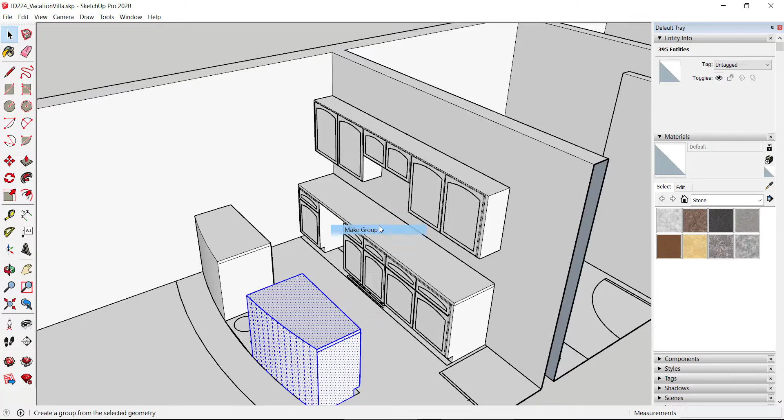Actually, what I'm going to do first is group these cabinets together. So I'm going to triple click on this cabinet, and you should see that the doors and drawers also go. Right click, group, triple click, right click, make a group. Same thing here, triple click, right click, make group.

Now I could have taken this countertop and made it flush with the doors. That happens a lot, so that in case you spill something, you have the top of the drawers covered and the stuff that spills doesn't get into the drawers.

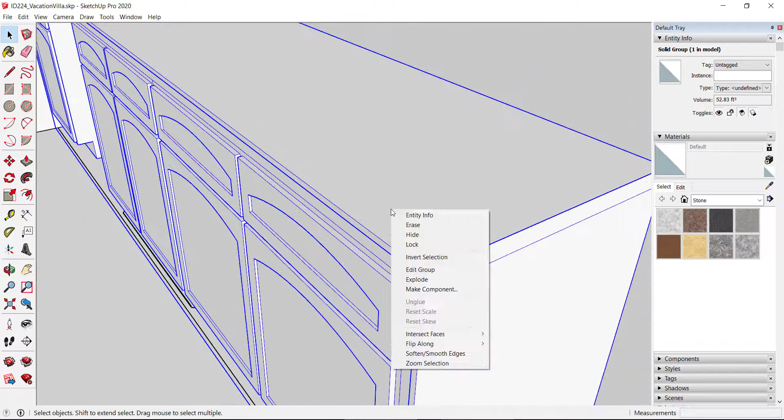So since I just made a group, remember that you can right click, edit group, and then use the push-pull tool to bring this countertop out. And if you even want to go over, maybe I'll go over an inch. That way you can see that my drawers are well protected. I don't need to worry about the side, that doesn't really matter.

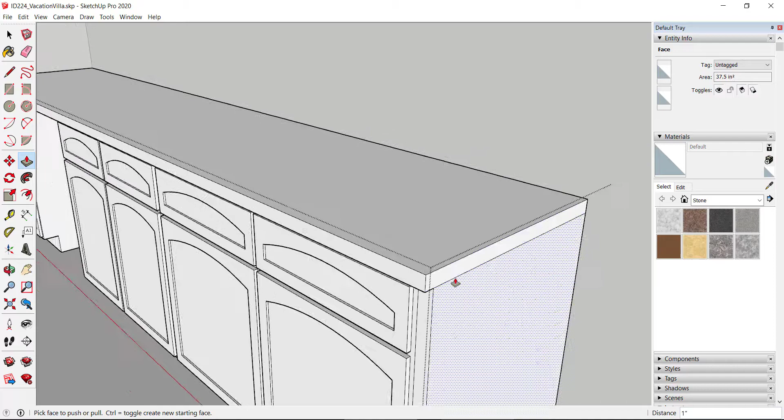I'm going to use the black arrow to click out of the group, so I'm back in here, and I'm going to triple click on the walls, right click, and make a group. Again, this is just to protect it so that in case I put accessories or something on it, the cabinets don't stick to the accessories.

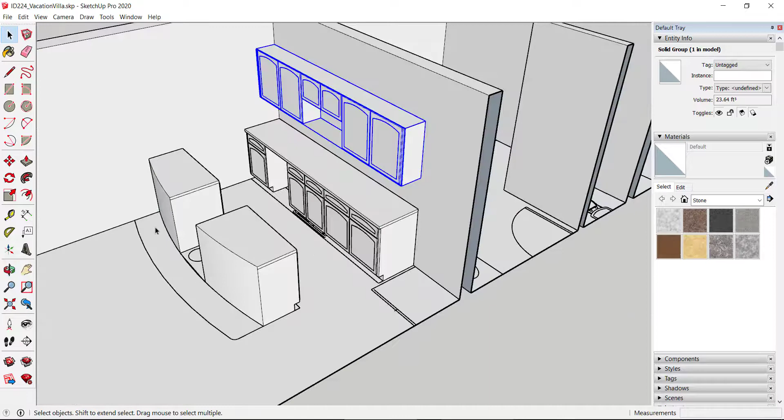Alright, so I'm going to make this little area right here. I'm going to use the arc command, and draw in this very far corner, start the arc, end the arc, and then finish the arc. So I've got to zoom in a little bit so I get it to the right line.

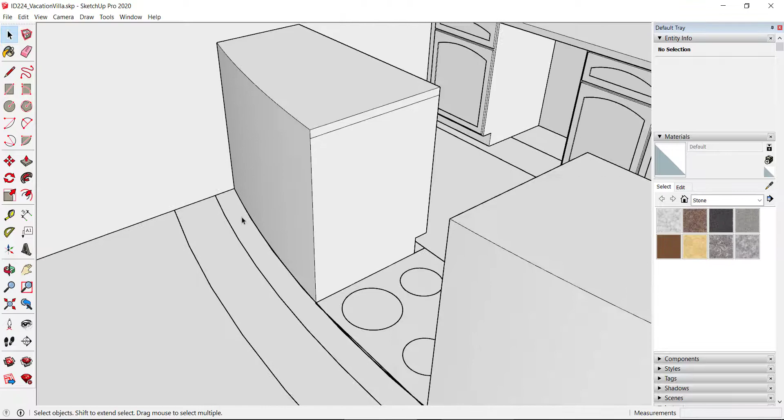That's perfect. What I'm going to do is go ahead and offset that line. I'm going to bring it out 5 inches. I also need to draw a line at both ends so that I can create a closed shape. So there was one end and here's the other. This one sticks out just a little bit, and that's okay.

I'm going to do something like this, and there you can see that it created a face. I'm going to use the eraser to get rid of that little extra line.

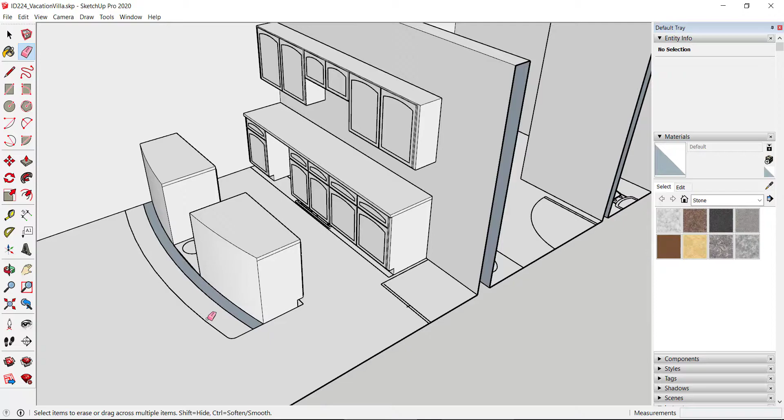Breakfast bars are usually anywhere from 30 inches to 42 inches. So I am going to make a 42-inch high breakfast bar. That means I need to leave a little space for the countertop. So what I'm going to do is push-pull this up 41.5 inches, and then this countertop can fit right on top of it here.

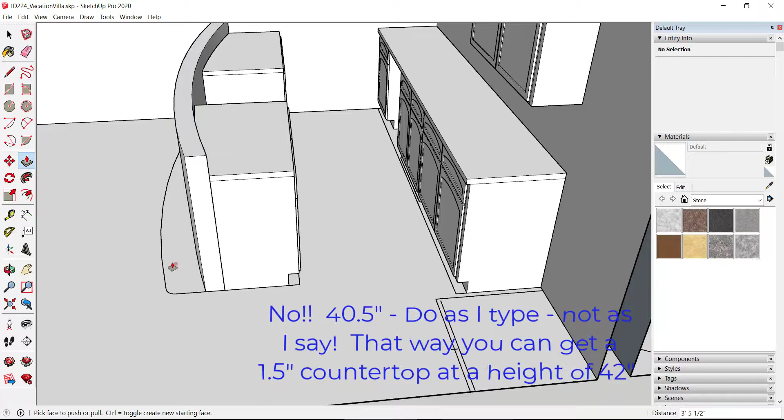Alright, so here's the tricky part. I want to get this CAD drawing up on top of this breakfast bar wall. I can't grab it for whatever reason. SketchUp is only letting me grab the wall system.

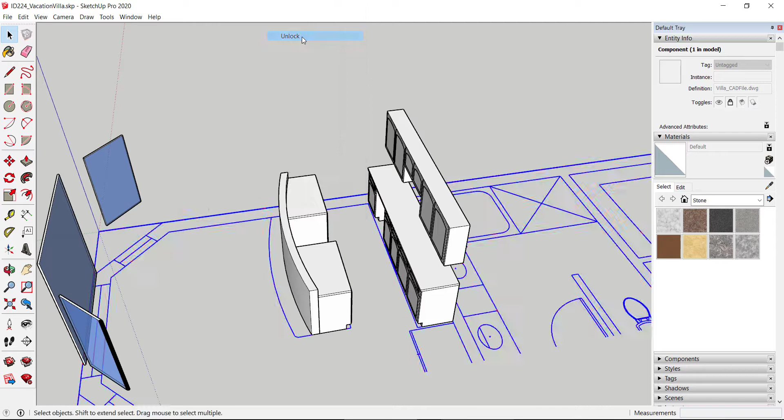So I'm going to do this little trick, right click, hide temporarily. Then I can grab the CAD work. I can right click to unlock it and turn it blue. I can use the move command, and I'm going to go right here at this wall. I'm going to click at the base of this corner and move it all the way up. Then I can see the line work on top. I'm going to right click to lock it back in place so I don't accidentally move it.

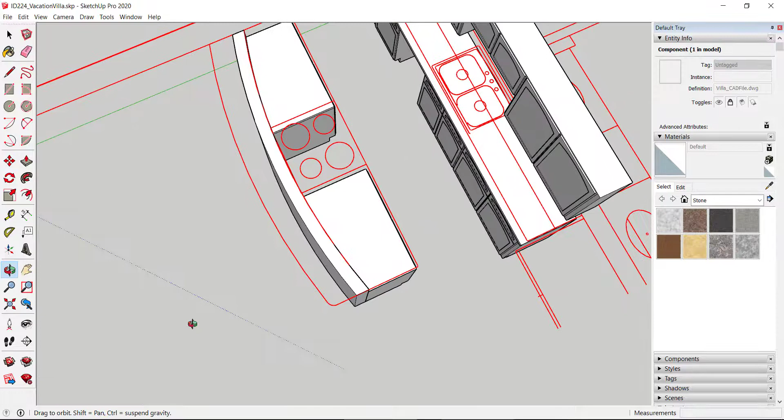I am going to use the arc command, and we're going to redraw right here. Start it, end it, finish it, and again go to the correct line if you can, right there.

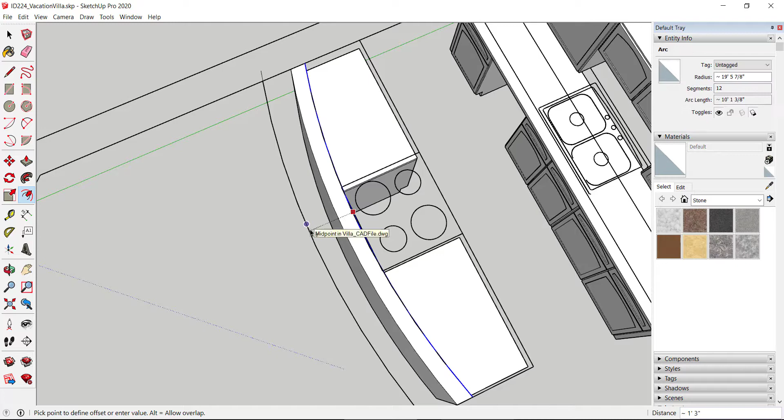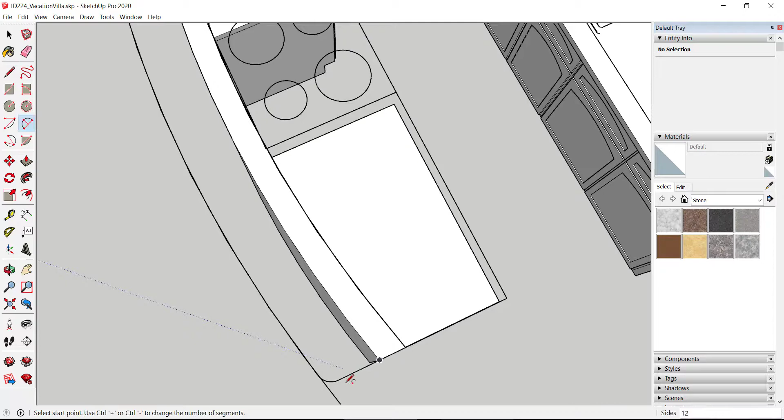I'm going to offset that line again and move it to the line work here. I'll take my pencil tool and finish the ends. Looks like we have a little line extra on that side - that's okay, and a little extra here too. There's a little curve right here, so we call that a fillet in CAD terms. I'm just going to make sure I draw a little mini arc - start it, end it, finish it. There we go, and you should see that you get a face.

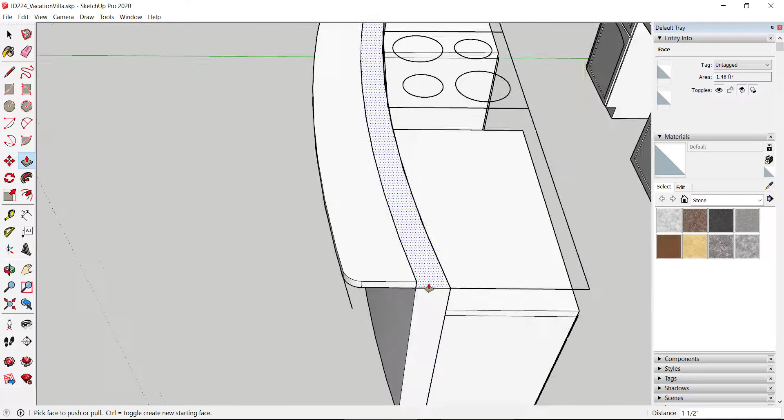I'm going to use the push-pull tool, move it up 1.5 inches. Same thing here, 1.5 inches.

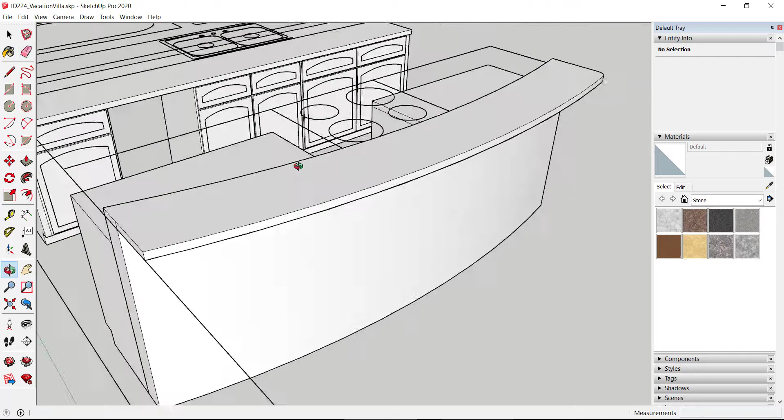And then I'm going to take the eraser and erase that line, and erase this line. Now I can't erase these two lines because they help form the curve, but I can erase this guy. And I can come over here and erase this guy. This is straight because it's up against the wall.

So that is how you can get your little breakfast nook in, and see how nice that looks on this side. Amazing. Now these are definitely custom cabinets. They are not normally built this way, but that's okay - we can have some custom in our lives, right?

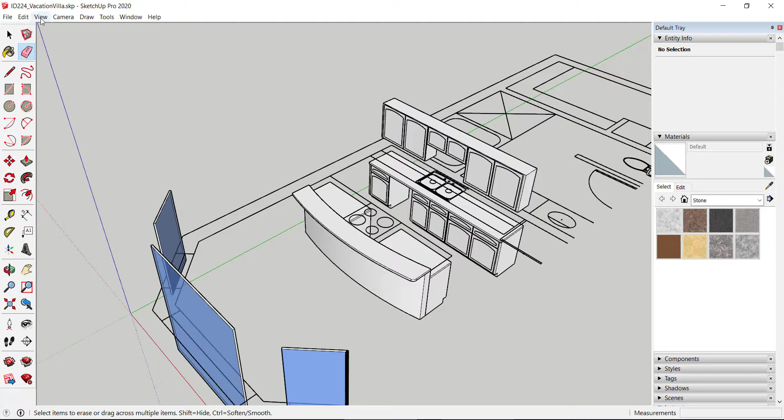All right, so let's bring back that wall system. I'm going to go to View, check Hidden Objects. I'm going to use my arrow to click on the wall, right click, unhide, click off, and then go back to View and uncheck Hidden Objects.

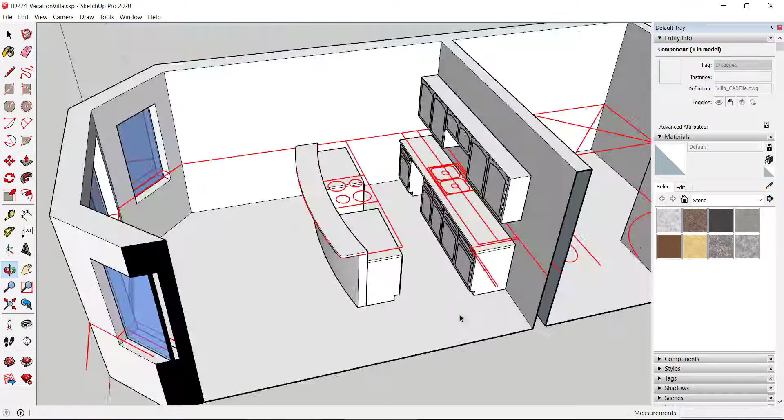Actually, you know what I did? I forgot to put this stuff back on the floor, so we need to fix that real quick. Here we go again, you guys - oh, you can grab it. Oh, that's nice. I wonder why you couldn't grab it on the floor - must have something to do with the fact that there's a face there. So I'm going to right click, unlock, use the move command, grab it from right here, and move it all the way down onto the floor again.

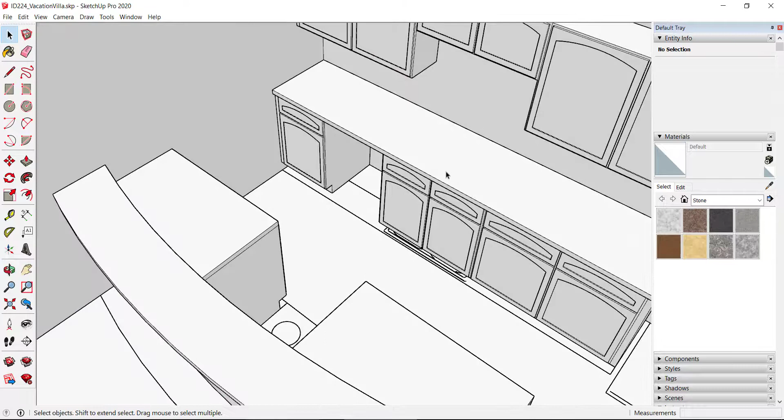The only thing left that I need to do is cut a hole for the sink to go into, so that's going to be semi-easy. Remember that this is a group now, so I'm going to right click, edit group. I need to re-find where this cabinet is.

So I'm going to use the measuring tape tool, this time on top of the countertop. I'm going to find the center, because remember the sink is centered. I'm going to come over here 18 inches, and then I'm going to come over this way 18 inches, and then I know exactly where the cabinet sits.

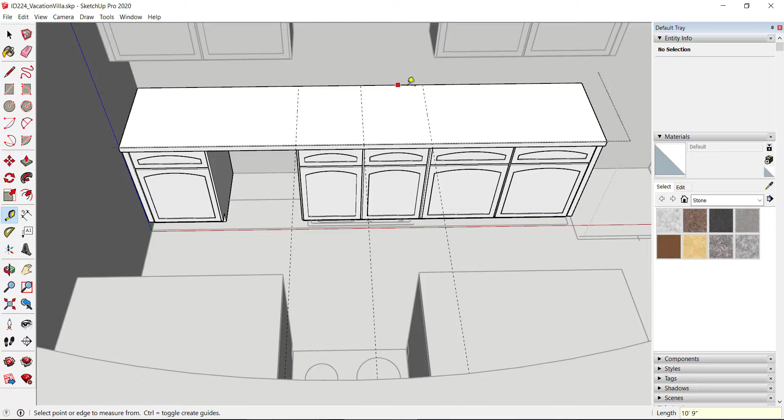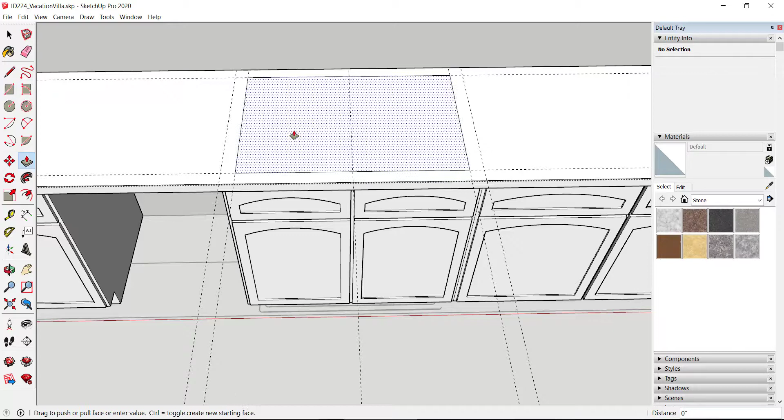So I need to cut a hole in this countertop so that there's still a little bit of counter that the sink can rest on. I'm going to move this in 2 inches, same thing on this side, same thing going this direction 2 inches, and from the back 2 inches. I'm going to draw my rectangle so that I can score, and then push in 1.5 inches there. So I've cut a hole in the countertop.

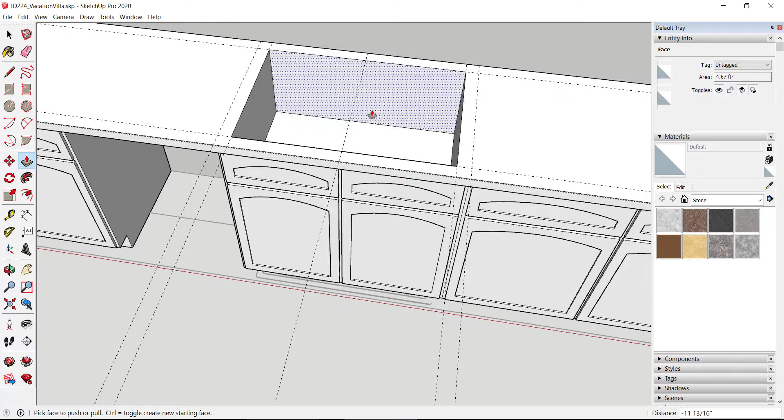And now all I need to do is just drag this down, because this is inside the cabinet, as far as I need to in order to install a sink into this hole. So you can go to 3D Warehouse, find a sink, and fit it in the hole. And if needed, like if the sink is smaller or a different size or shape, you can always push-pull these sides to custom fit your sink. Just make sure your sink is centered on this line.

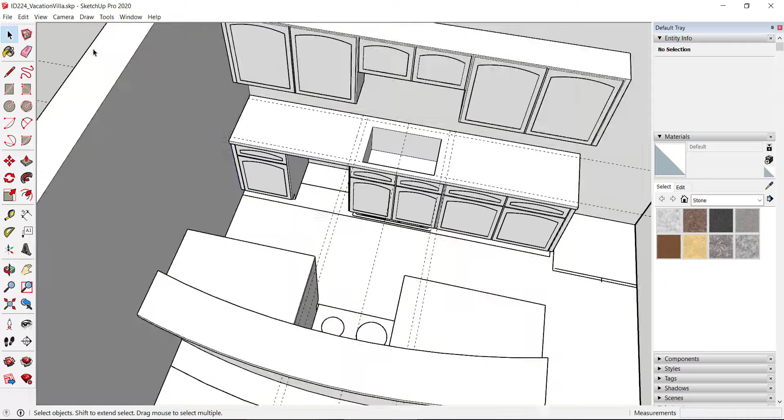Once you've completed that, just use the black arrow to click out, edit, delete guides, and there you guys have completed the kitchen.